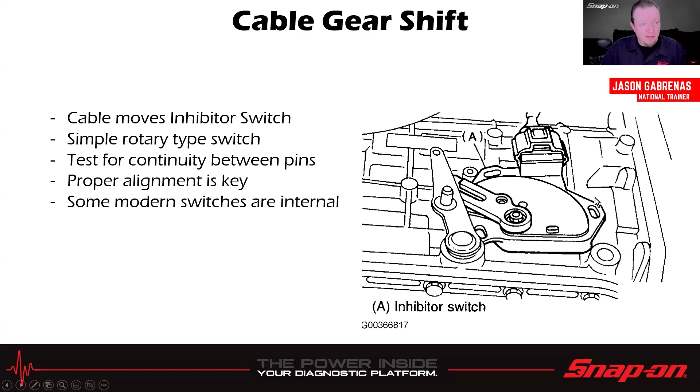And then some modern switches are internal instead of external. So that brings up a whole other can of worms, I guess, if you need to adjust those. So definitely some good advice for that.

If we look at the switch itself, we see we have three sets of contacts. This one has park and neutral, which go to the starting and charging system. If for some reason it's not making contact there, maybe it's halfway in between or in reverse when it's not supposed to be, then it won't send the signal to the starting and charging system, and it won't allow start. This one's for the reverse circuit, because that goes to the reverse light system. So when it hits reverse, it closes the circuit and sends a signal out to turn on the lights.

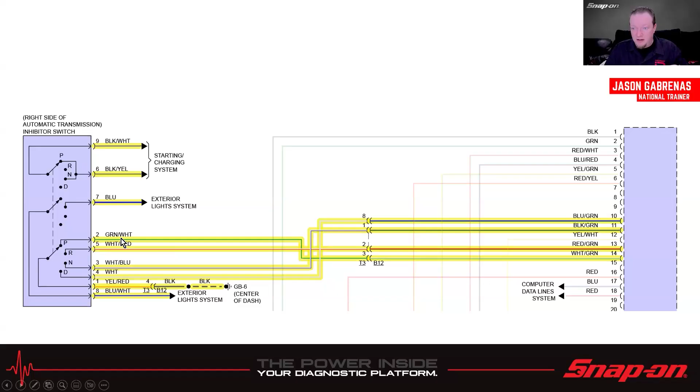And then down here is what indicates to the computer what gear we're in. In this case, this is an older model, so it has direct wires to each individual pin on the TCM. Some vehicles do it electronically now instead of having just the direct connection from park, reverse, neutral, or drive.

Also with these, and not necessarily just these, there's also sport shift, which you can see in a vehicle. You pull the gate a little to the left, and then you just go forward and backward to manually shift your automatic transmission.

It can be had with or without a cable. It's simple switches for the plus and minus. So there's a switch to know it's in the gate, a micro switch to go forward, a micro switch to go backward, and it just sends the signal along. So you'd want to test for continuity between the pins.

Alternatively, steering wheel paddles and switches can be used. Now, when it comes to the steering wheel, probably not so much micro switches anymore—well, I guess they still have micro switches in them, but they're not sending voltage. They're usually sending a LIN signal over LIN bus. So oftentimes, most of the things on the steering wheel nowadays send a signal over LIN bus to whatever module needs it.

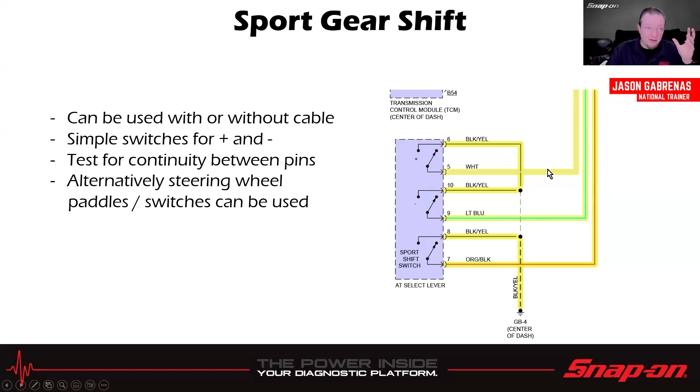So this is the sport shift switch. That's when you put it in the gate, and then up and down, right? So you've got plus, minus, and the sport shift switch there, and those send the signals out to the TCM, so the TCM knows it's time to shift up or shift down.

Then we get into the wonderful world of knobs. I believe this started in Chryslers—it's definitely very common in Chrysler, FCA, Stellantis, whatever you want to call them. Other vehicles use them too, but I thought it was an interesting choice to have a big knob next to a bunch of other big knobs. If I'm trying to pay attention to driving, not looking at where the knob is, and just kind of holding my hand over it, a mistake might happen. Actually, come to think of it, I think there was a movie or TV star who passed away because his Jeep crushed him at the end of his driveway—he thought it was in park and it wasn't. So there you go, and it did have a knob shifter as far as I recall.

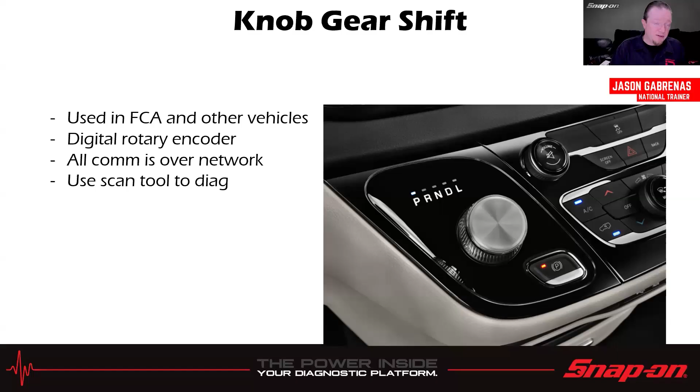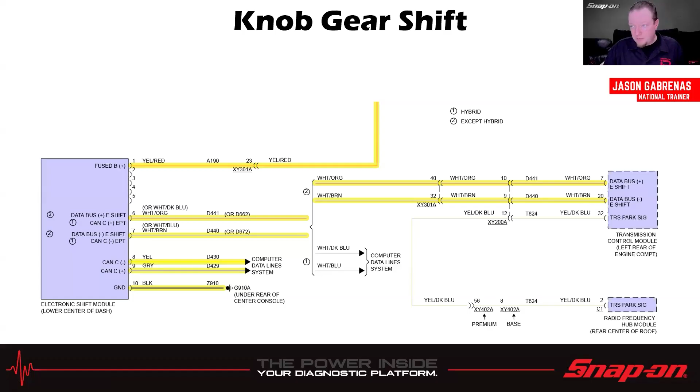Anyway, it works as a digital rotary encoder, so it's all digital—sends it over the network. You're going to use a scan tool to diagnose it. You might be able to use a scope as well, because it does go over CAN. In this case, we have the data bus for the shifter and CAN, plus other CAN buses associated with it. But from the shifter to the transmission control module, it's all CAN. So you could check for a CAN bus signal there, or check to see if the data changes in the transmission control module.

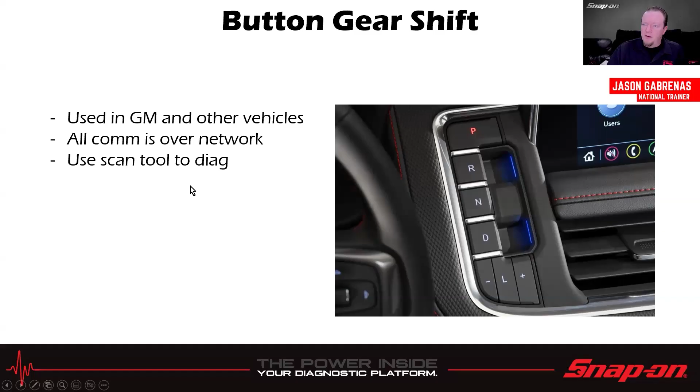We've gone back to buttons. Way back in the day, there used to be button shifters on the console or dashboard, and now they're back in GM and other vehicles. All communication, once again, is over a network. This is basically just a module, and you use the scan tool to diagnose it. I could actually manually shift up and down here too, which is kind of an interesting choice, but you definitely use your scan tool checking for data, because this is going to be digital network data going over the lines there.

In this case, this is off a GMC Acadia. The gear shift control module is right there, and we have multiple data lines coming off of it, and there's a logic panel in there. It sends the signal digitally, like I said.

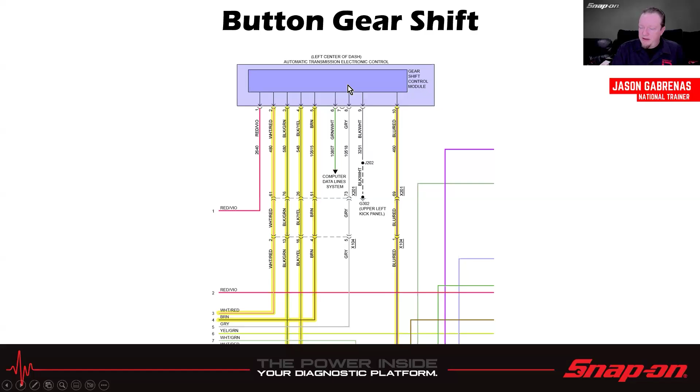More recently, we have stalk gear shifts. The first time I ever saw it was in a GM, but I'm sure other manufacturers are doing this too. I had a brand new Acadia as a rental a few months ago, and I'm like, oh, where's the shifter? Oh, there it is - it's not my wipers anymore, it's my shifter. And how do I get this thing out of park? Luckily they label it, but it's not intuitive at all. If you're in multiple different vehicles, like rental cars all the time, it's not that intuitive. I'm sure you get used to it after a while.

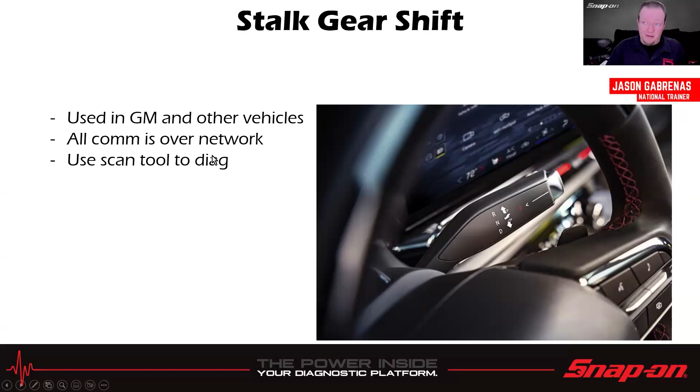Once again, this is all digital, so it comms over the network. Use a scan tool to diagnose it, and possibly a scope if you're trying to read the signals.

Now, another interesting thing with this - if you look at the wiring diagram, here is my gear shift control module, which is in the steering column, the right side stalk. Looks like it does have actual micro switches in there, probably. It does have where it makes connections, but it all connects into a logic board, and then the logic board makes the decision on what to do.

Also interesting, it is provided a 2.5 volt reference and a 1.5 volt reference. So if I didn't look at the wiring diagram and was looking for a 5 volt reference somewhere, and only finding 2.5 volts, I'd think, oh, I got a voltage loss somewhere. Well, guess what - it only runs on a 2.5 volt reference there and a 1.5 volt reference there. Luckily it's spelled out in the wiring diagram. That's certainly an interesting choice. I'm sure it doesn't need that much voltage to process what it needs to do, but everyone else uses 5 volts - I don't know why they couldn't just use 5 volts across the board. But anyways, that's a thing that exists, and you may have to diagnose it sometimes, so keep that in mind.

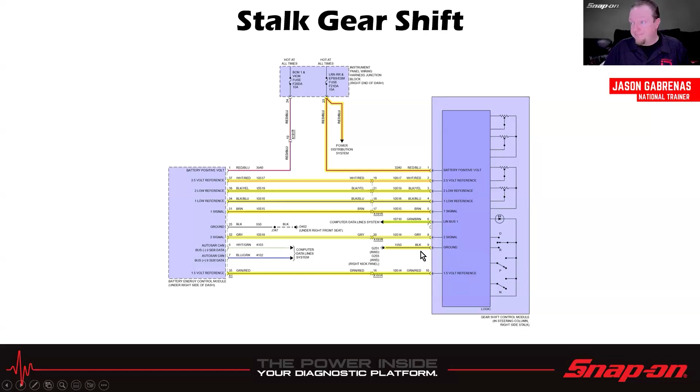All right, let's go to the sensors that are going to help the computer understand what's going on in that transmission. So we have a temp sensor for the fluid temperature. Some are negative coefficient thermistors, some are positive coefficient thermistors. In the case of a negative coefficient, as the temp increases, the voltage decreases. Test for voltage and resistance, and sometimes it's part of the valve body.

Due to it being part of the valve body, it might be difficult to access. Some of them are kind of on a harness right there, and it's easy to get to when you drop the pan. Other ones are maybe up on top or just in a not as easily accessible place.

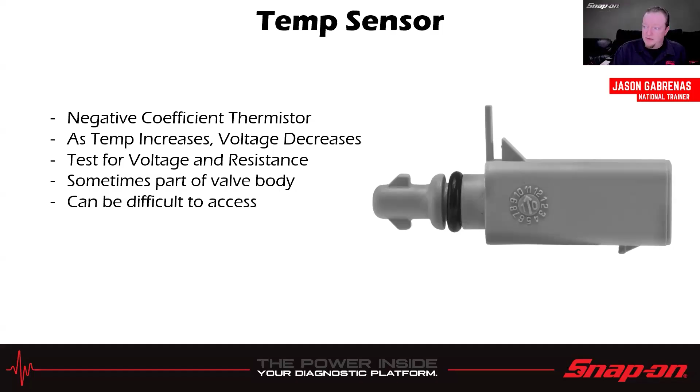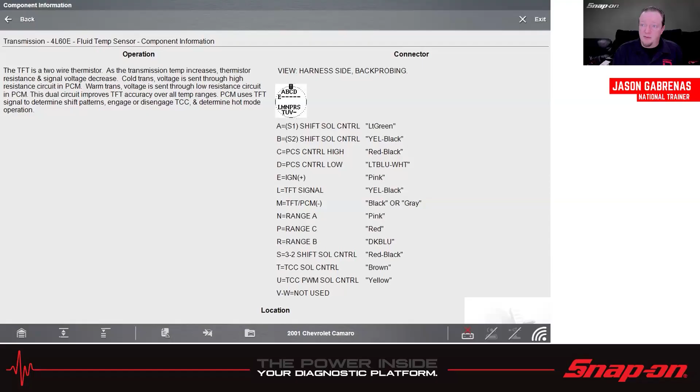In this case, this is on a 2001 Chevy, so a 4L60. Transmission fluid temperature sensor is a 2-wire thermistor. As the transmission temp increases, thermistor resistance and signal voltage decrease. Cold transmission, voltage is sent through a high resistance circuit. Warm transmission, voltage is sent through a low resistance circuit. This dual circuit improves accuracy over all temp ranges. PCM uses the transmission fluid temperature signal to determine shift patterns, engage or disengage torque converter, and determine hot mode operation.

So it's also good to be able to find this temperature to resistance to voltage chart. If it's say 104 degrees Fahrenheit, 40 degrees Celsius, that'd be 1313 minimum, 1459 nominal, 1605 maximum, which gives us an output voltage of roughly 1.10 volts. You can see how it varies a little bit. Right here is where it looks like it switches over, because it goes from 3.45 down to 1, and then it goes 3.25 down to 0. So there's a switch over in the middle - we go from the high resistance to low resistance circuit, like they talked about.

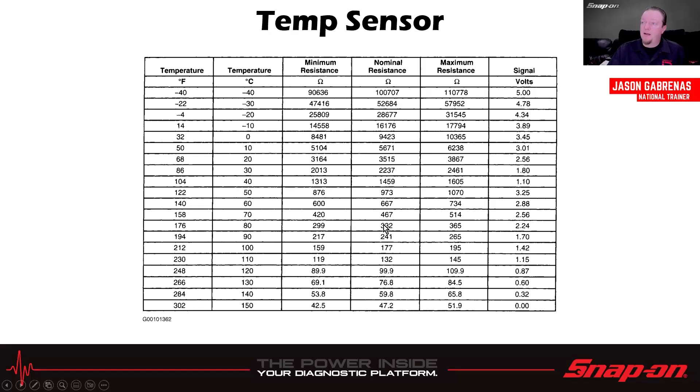Next is a speed sensor. Generally speaking, they're going to be a Hall effect sensor, 3-wire. Reads input and/or output shaft speed, or multiple shaft speeds. It could be multiple things, but you're generally going to have 2 - an input and/or an output. You're going to test it for voltage or resistance.

Sometimes it's part of the valve body, and due to that, it can be difficult to access. Sometimes they're right on the outside of the vehicle and they just bolt in like a crank sensor or a cam sensor. That makes it a lot easier.

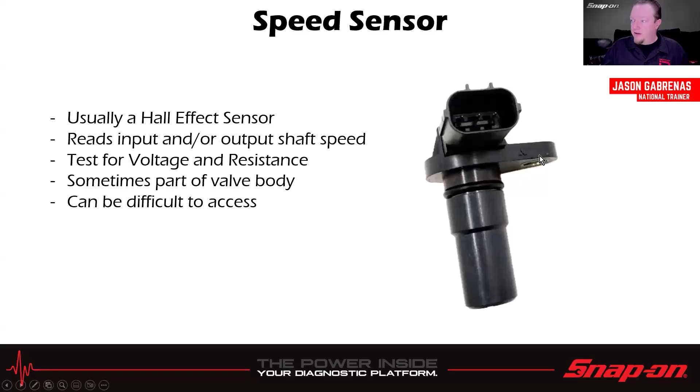So this would obviously be an external one. Looks like it's a Mitsubishi according to that logo right there, but it's just a Hall effect sensor like a cam or crank sensor. In this case, it's on an '09 Subaru, and that is the 5-speed automatic that they had for a while. So turbine speed sensor 1 measures trans input shaft speed and torque converter speed. Turbine speed sensor 2 measures transmission speed. This is one where they actually had some issues with these, at least the early ones, because the stack would move and shift inside the transmission.

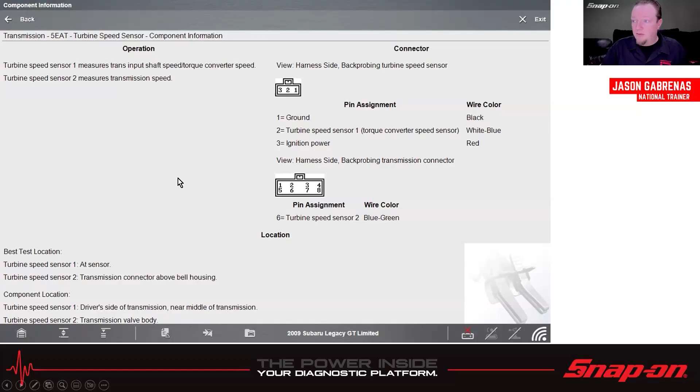And then it could throw a code for a speed sensor because the plate that it reads might go out of where it needs to be. I think it was probably just the early ones, but I do remember we had to deal with that in the shop where they were shifting.

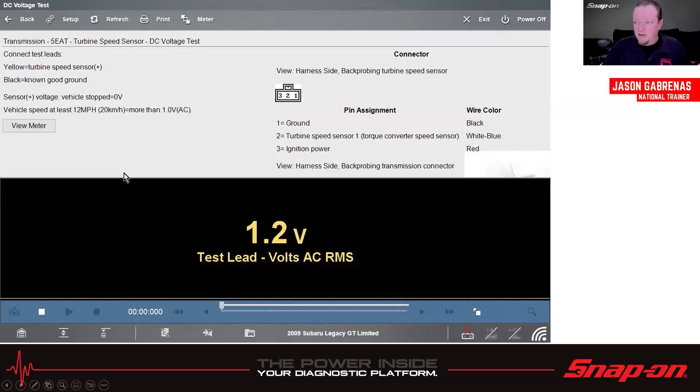And then here we go, let's just do a DC voltage test. It should be more than 1 volt AC, vehicle speed at least 12 miles an hour. So this actually does volts AC in this case.

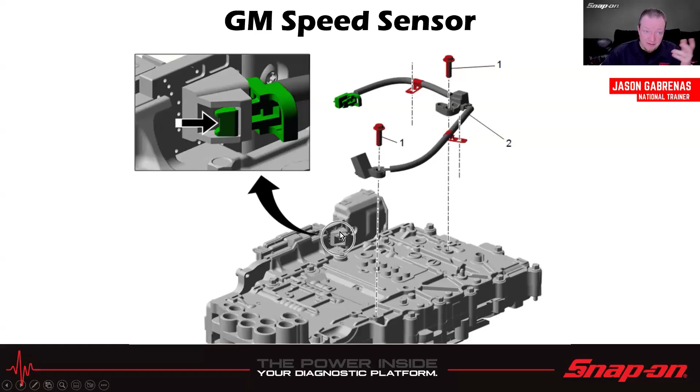Now remember how I said sometimes they could be difficult to access? Well, here's one on a GM, and you can see there's the connector there which goes off to the side there - there's the TCM. And then the 2 speed sensors are actually right above the valve body, so you would have to drop the valve body in order to access that. Probably, unless there's an alternate location you could test it, you probably have to test it outside of the vehicle because you can't get to it to test it.

All right, next we'll get to the solenoids. There's 2 different types of solenoids you're going to find in an automatic transmission, and they're usually going to be for moving fluid around within the valve body, shift solenoids and such. So we have on-off solenoids, which are either on or off, open or closed. Computer controls the ground side or the power side, depending on how it's wired. It's an open-close function - like I said, it's either on or off.

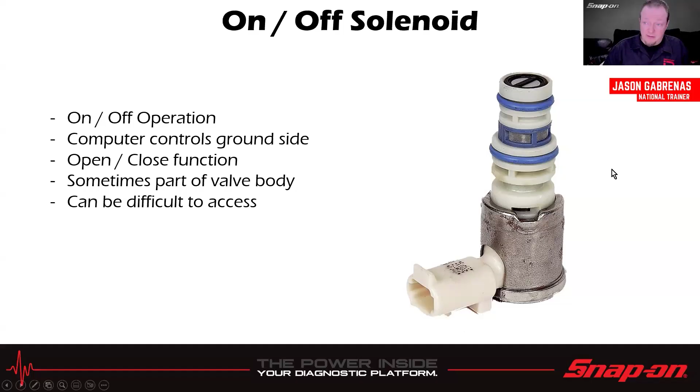Sometimes it's part of the valve body. Generally speaking, they're going to be in the valve body at any rate. They could be from underneath. There's a couple of vehicles I've seen where it's like all in a row in the back of the valve body - that makes it fairly easy to get to. I know like on Subarus, there's like a bunch of them around the bottom of the valve body, so it's just one bolt and a plug and it comes right out. Sometimes they're on top - just depends on the manufacturer. So due to that, it could be difficult to access.

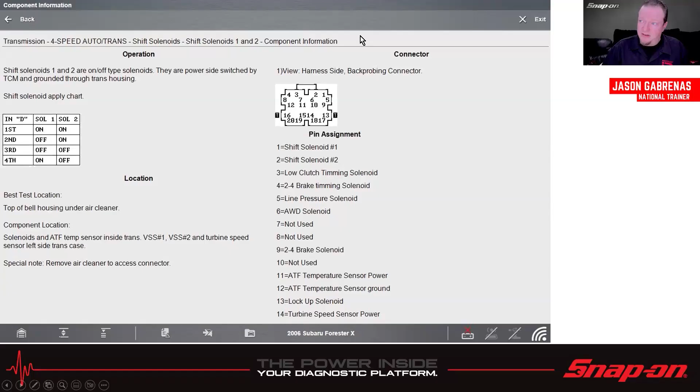So here's an example on a Subaru. We've got a bunch of shift solenoids - low clutch timing solenoid, 2/4 brake timing solenoid, all-wheel drive solenoid, etc. Everything kind of goes through that one connector, and then it gives you a little shift pattern here. So to be in first gear, both solenoids are on, and so on and so forth. And in this case, it's going to be at the main connector, so it's easy enough to get to.

Shift solenoids 1 and 2 are on-off type solenoids. And then some of the other solenoids are going to be a pulse width modulated solenoid - so it's modulated on or off. Computer controls power or ground side, depending. Opens and closes by a percentage - so say I want to close 80%, open or closed 80% of the time, or what have you. It just opens for a fraction of time.

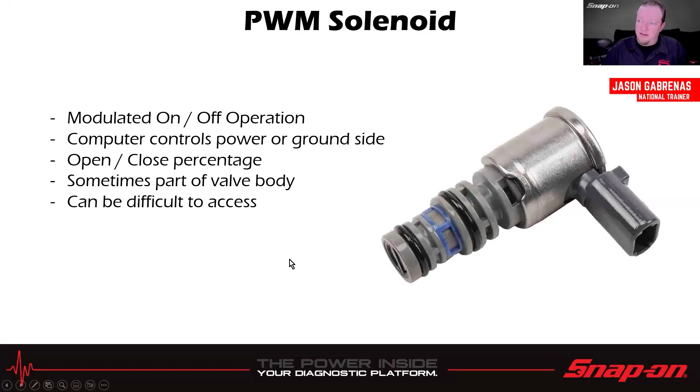Once again, sometimes part of a valve body, and if it is, it can be difficult to access. Sometimes you can only get - it's not replaceable. So the torque converter clutch, in this case, is an integral part of the solenoid body, and being so, it's not available as a separate unit. In this case, it is part of the valve body, so you have to order a valve body if this fails.

The torque converter clutch solenoid is both power side and ground side controlled by the PCM or TCM on some vehicles. It controls common solenoid power used by all solenoids in order to cut power in case of a circuit fault. Solenoid duty cycle is controlled on the ground side to allow for smooth torque converter clutch actuation.

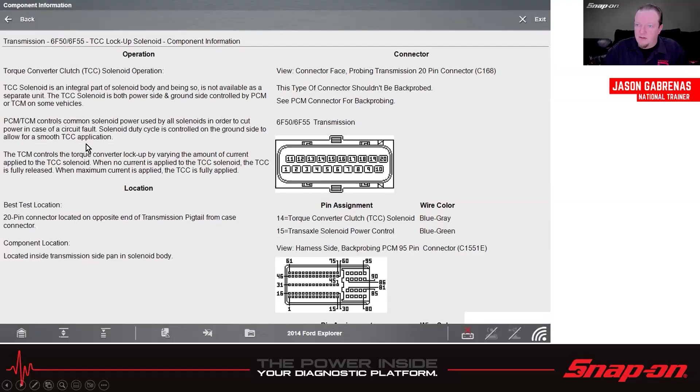We have some tech notes here: this transmission uses 2 on-off type shift solenoids and 6 pulse width modulated type solenoids for pressure control. This is on a 2011 Camaro.

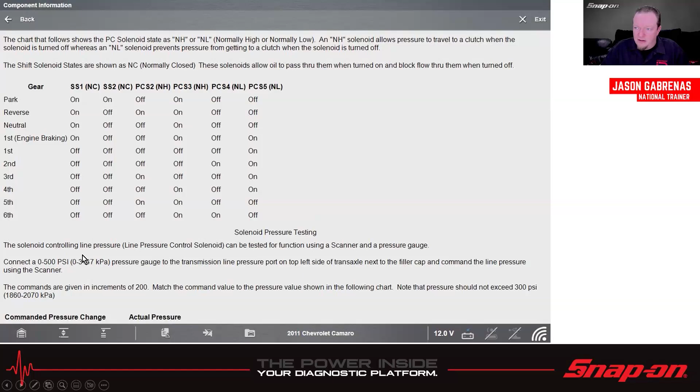So normally high, normally low, and then in whatever combination they need to get through all these different gear combinations. And of course, the more gears we have in a transmission, the more solenoids we'll need to make it work.

We could also do pressure testing. So if we use a pressure gauge, or you could even use a pressure transducer on this. In this case, 500 PSI they want, and then you can check your actual pressure based on your command pressure change.

And then we get to adaptives. Adaptives are used on multiple manufacturers. I think probably pretty much everybody nowadays uses some sort of adaptation. As you drive, it learns how you drive.

So to equalize tolerances and wear, an automatic adaptation takes place for shift time, clutch filling pressure, torque converter lockup control. Adaptation data may be stored permanently and to some extent can be diagnosed.

And then there's driving style adaptation. Shift point is modified in steps based on the information from the inputs. The control module looks at these different inputs, and based on how aggressive the driver is, the TCM moves up the shift so the present gear is held a little longer before the next upshift.

So if you drive like a little old lady, it's going to shift differently than if you drive like a race car driver, right? So it adapts over time.

And when you replace things in the transmission, you usually need to use the scan tool to initiate some sort of learning mode, adaptation mode. So in this case, once again, a GM service fast learn adapt. There's a bunch - every manufacturer calls it something different.

But it says the procedure must be performed when one of the following repairs have been made to the vehicle. Failure to perform the procedure after one of the following repairs may result in poor transmission performance as well as transmission codes being set: transmission internal service or overhaul, valve body repair or replacement, control solenoid valve assembly replacement, TCM software calibration update, any service in response to a shift quality concern. So it needs to get done anytime any of that happens.

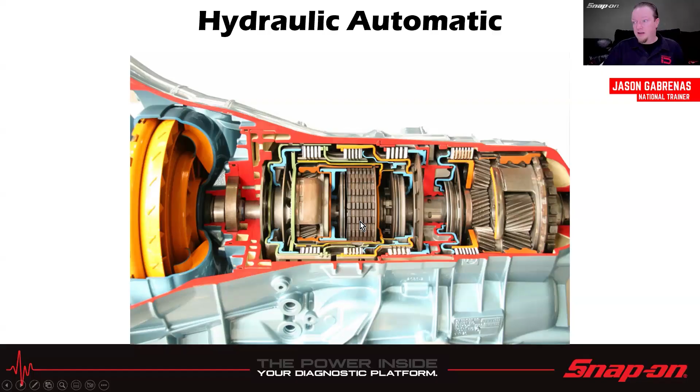That is your standard hydraulic automatic transmission. It's been around forever. There are a couple different transmissions out there now that are a little unique. This one's the Volkswagen and Audi DSG, so that's a direct shift gearbox.

This is basically a hydraulically actuated manual transmission with 2 clutches. That's what it is. And we can see actually it's got a cable shifter. So look at that.

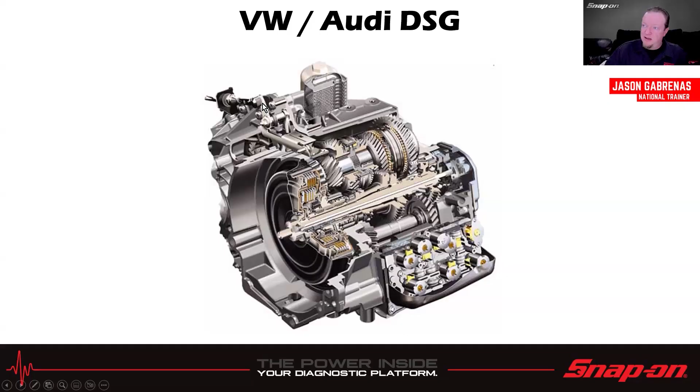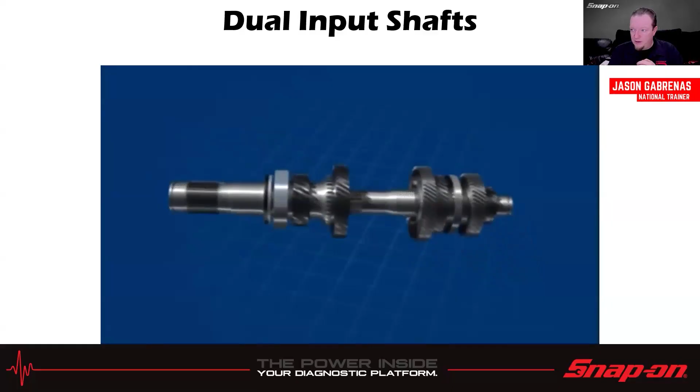The heart of this is going to be dual input shafts. The outer one rides on the inner one. You see that the outer side has a larger spline than the inner one, and that is to go into the 2 different clutches. Now half the gears go into one and half go into the other. That's because if first gear's on one shaft, second gear's on the other shaft, third gear, and so on. So it kind of alternates back and forth in order to be able to shift using the automated clutch.

The automated clutch that Volkswagen and Audi use is actually like a friction clutch that you would see on a standard or manual transmission. So it has two clutches. You see that one has a larger spline and one has a smaller spline. The larger spline goes on the outer shaft, the smaller spline goes on the inner shaft, and then we have 2 clutch forks here that kind of operate within each other.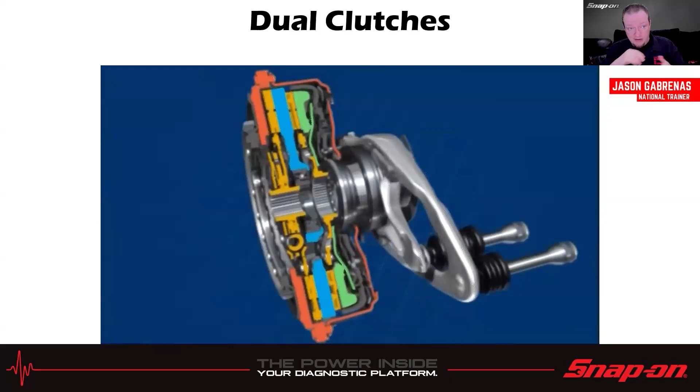And then these are actuated by hydraulic pistons, so hydraulic actuators—they call it the mechatronics. That's one way of doing it, and that's how Volkswagen Audi decided to do it on their direct shift gearbox.

BMW also has a dual clutch transmission, which is essentially a manual transmission, but instead of using clutches, it actually uses dual clutch packs like on an automatic transmission. So it's hydraulically actuated just by compressing the clutch packs instead of having the forks and the friction material and the pressure plates and all that other stuff that Volkswagen did.

Seems to me this is probably less moving parts, so it should be simpler, I would imagine. And it's probably just a clutch pack that you would just replace. I don't know, I've never had to replace one myself. You could probably rebuild it, or they probably sell you a whole thing, or you just replace the whole transmission. I don't know. But it does look very much like those clutch packs we saw in the automatic transmission, the hydraulic actuated transmission, because they are.

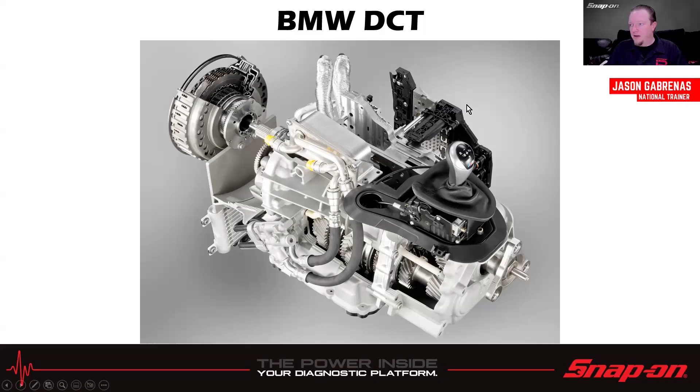It's the same idea, and this normally would be on the shaft. This has got two input shafts as well for the 2 clutches, so the clutches kind of overrun each other. And it's got the mechatronic unit over here, which helps with the pressures and stuff like that. There are some things that need to be done scan tool wise on that too, because of the oils and stuff like that.

Next one's the CVT. Many manufacturers have gone to a CVT, many manufacturers have not gone to a CVT. Some manufacturers, instead of making a continuously variable transmission, which is what CVT stands for, they decided they're just going to keep adding gears. We've got 10-speed gearboxes out there now, 11-speed gearboxes out there now, automatics. So it's all in the name of fuel economy, really.

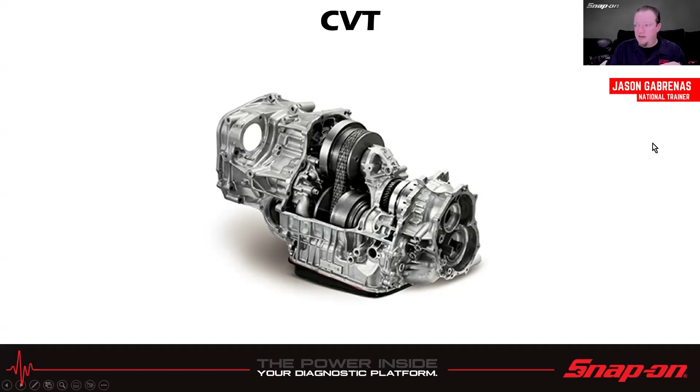But the CVT—this one's off of a Subaru, so it's a little less compact than some other models you might find out there. They've been around forever, but probably the biggest mass market one was the Murano. That was probably one of the more famous ones, I guess, because they used to break all the time spectacularly.

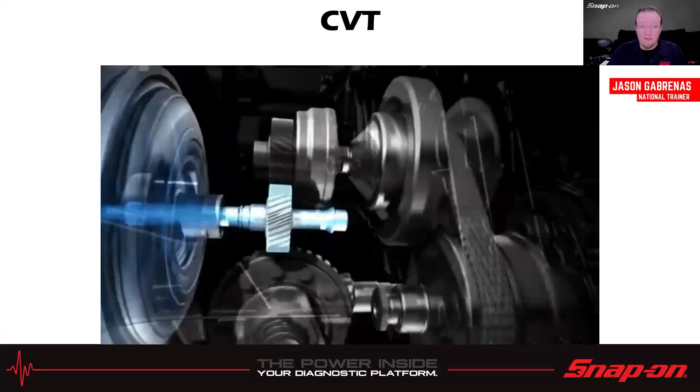So much so that Subaru bought a bunch of them to tear down and find out where the weak points are, and engineer that out when they made theirs.

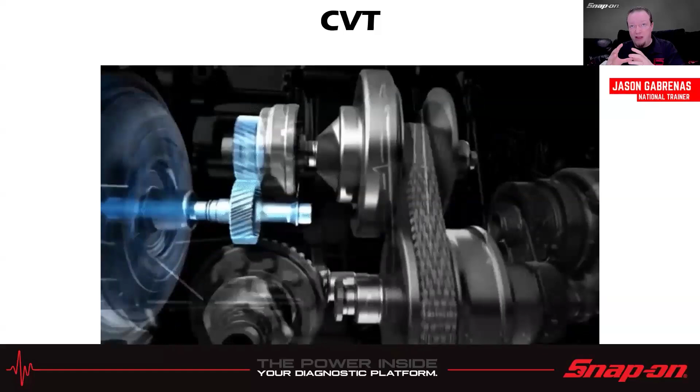But anyways, we can see we got two pulleys, and they're kind of variable pulleys, and this is a metal belt that goes in between the two pulleys. By changing the size of the pulley, you're changing the speed of the output shaft. So the input shaft's probably going to be the same speed.

That was the wild thing. The very first time I drove one of these, you're driving down the road and it's accelerating, but the RPMs are stuck at 3,000 RPM. It's not going any higher, but the speed sure is. So it's just continuously changing and varying those to increase the output speed.

No actual gear changes. Of course, there's gears in there, mesh gears, but no gear changes. Now, so much so that nowadays many manufacturers have programmed in actual shift points, so it feels like the car's shifting even though it's not.

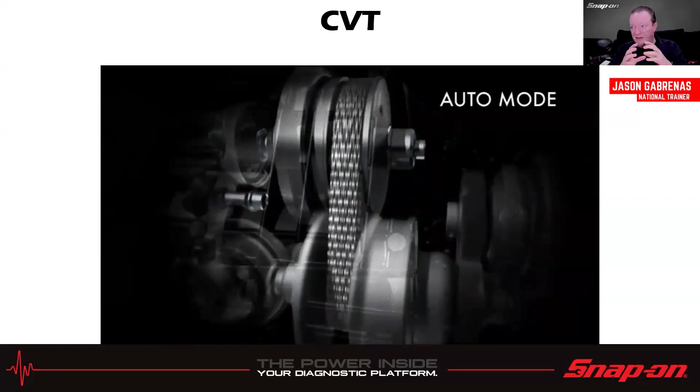I'd imagine it probably just gives it a quick jolt or something to make it feel like a shift. I'm not 100% sure how they make it feel that way, but I know my mom's got a 2017 Crosstrek and it feels like it shifts even though it's got a CVT in it.

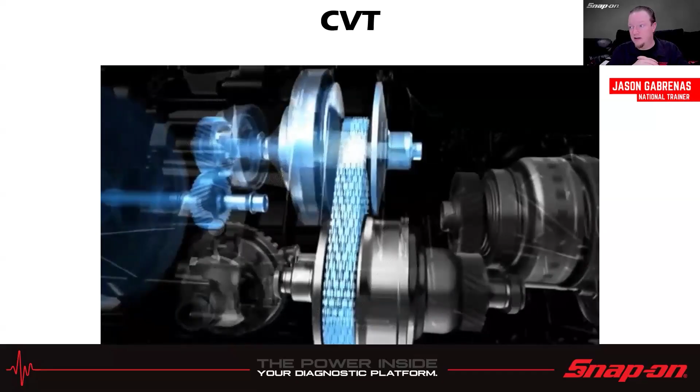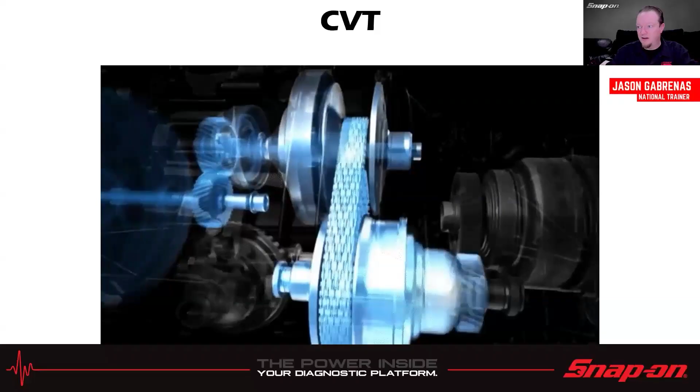I think it's just because end users were a little disconcerted, or maybe they were going way too fast, because I could see that happening too. I can accelerate up to 80 without really noticing, and like, oh boy, I'm speeding, okay let's slow it down a little bit. So I would imagine it was end user feedback that caused that to happen.

It's kind of interesting. So like I said, metal belt, two pulleys that change size so one spins faster than the other.

Usually, I believe most manufacturers say if anything goes wrong with these, it just gets a transmission anyway. I just thought it was kind of funny when we got trained on these.

For the first year, it was like the 2010 model year, they actually had us go in and tear them down and rebuild them. And then after that, they said, well, you're never going to do that, because if it's so much as a drop leak, we want it back and we're going to send you a new one. So I don't know why they had us ever tear them down, because I think even still to this day, 15 years later, they're just putting remans in if they need it, anything to do with the transmission.

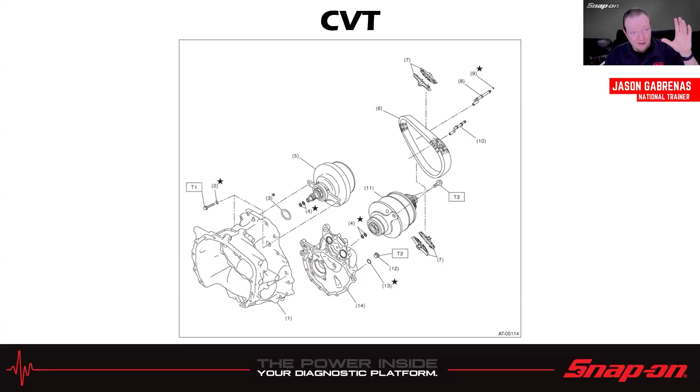Don't take it apart, it's permanent fluid. Don't need to do anything with it. Just don't touch it, just let it go, I guess.

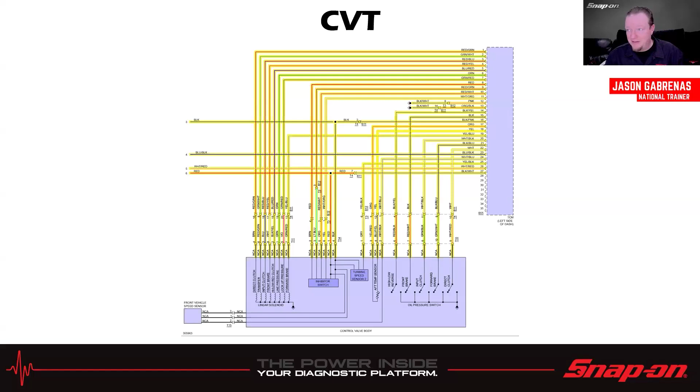And you see it's all electronically controlled, right? So we got clutches in there, brakes in there, but it's all like oil pressure switches, and the TCM just controls everything. So really no tear down going to happen with one of those. Maybe you might, if you like doing it, I don't know, I guess you could, but more than likely it's probably going to get a transmission.

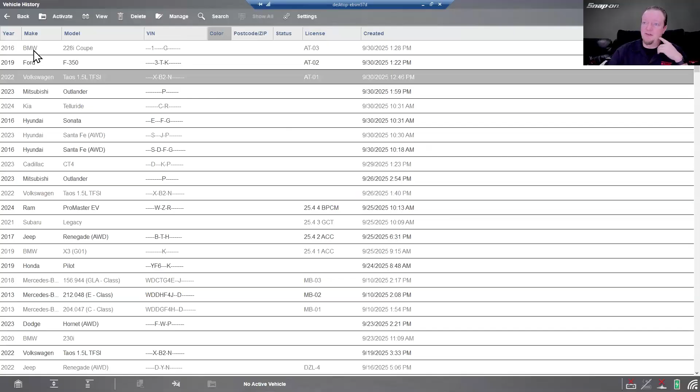All right, let's go live on the tool and take a look at a few examples of what I just spoke about. So first one's going to be this 2022 Volkswagen Taos, and that has the dual shift gearbox.

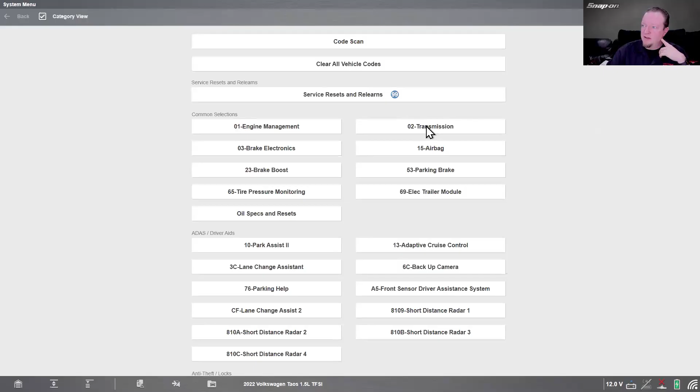So I'm just going to load in there, go into number 2 transmission. It's going to tell me I'm in sim mode. I got to pick the right one, and that is this one. And you can see, oh by the way, 2022 Volkswagen, so that means we have SFD, which is the secure functions, Secure Functions Diagnostics I believe is what that stands for.

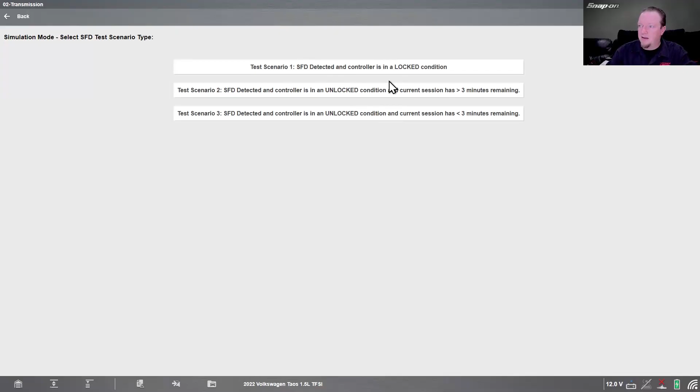It's German, they mix up the words. But some systems may require access to manufacturer secure diagnostic requests. So we might be able to see that if we go into functional tests. Yeah, I can, in the simulator, simulate any of the modes, so we'll just say it's locked and go in.

Now with Snap-on tools, with Volkswagen and Audi vehicles, in order to access these secured functions, all you need to do is set up a free profile access code in your Snap-on profile. So it's any 4 digits, and if it needs access, it's going to prompt you to enter those 4 digits here.

So I'm going to enter the wrong ones just so you can see what happens. And okay, oh sorry, invalid code, 4 attempts remaining. So you get 5 total attempts to get in, and it just locks you out.

So I'm going to put in the right one now. Okay, and now it'll allow me to do the functional test. So Volkswagen Audi is a little bit different than what you might notice with like Stellantis, where they lock the whole vehicle out, and Nissan, where they lock the whole vehicle out.

On Volkswagen and Audi, it's down to the functional test level, so you won't get prompted until you get to a test that's secured, which is good. It saves you time and hassle.

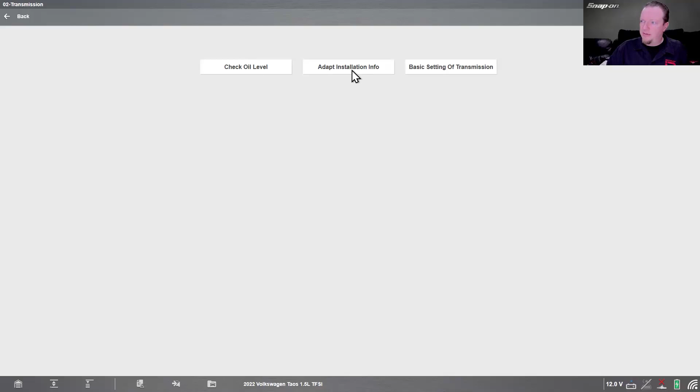If we go into special functions, we have things like check oil level, adapt installation info, and basic setting of transmission. For installation info, the following steps will be performed: establish basic setting for CAN installation information. It's only going to let me go so far, but this needs to be done after software update, after replacement of the control module, after replacement of the selector lever, after work on the steering wheel paddles, and after another control module is replaced, for example engine, ABS, or gateway. So this needs to get done in a fair number of circumstances.

I'm just going to go in there, and it's probably going to fail. Oh, I know this is the one that runs forever and never stops. It's just going to go through and do the routine on a real live vehicle, not a simulator. It would go through and say, all right, it's complete. In this case, I need to cancel.

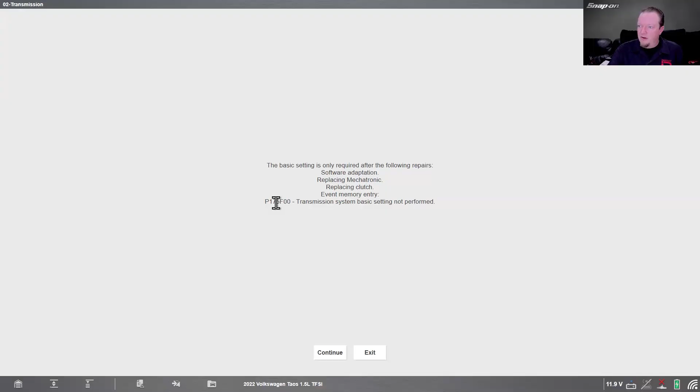Basic setting of transmission is going to be similar. When I do a software adaptation, replace the mechatronics, replace the clutch, or have an event memory of this P175 code, that needs to get done. If the entire transmission is replaced, you don't have to do this because it's going to have basic settings anyway. Engage P, start engine and let it idle—and it's going to say it's too hot. But let's see if it just lets me exit. There we go: test parameters are not correct.

Now this brings me to another point. We get phone calls a lot at the tech support center saying, hey, this test doesn't work, why is it not working, it's broken, et cetera, et cetera. Well, the manufacturer oftentimes has certain set parameters that need to be met in order to do this function.

So we will not let the function happen unless it matches what the computer wants. Most times we will try to have that verbalized on the screen, like it said there, it needs to be between 35 and 45 Celsius or whatever. We try as best we can to verbalize it on the screen. If for some reason we don't, we find it and then try to fix that. So the vast majority of the time, you should find help when it comes to that type of thing. If you don't find it in the tool, always look in your repair information, and that should give you what you need as to what it requires to do its tests.

Next one, we'll do a big old Ford diesel, a 350.

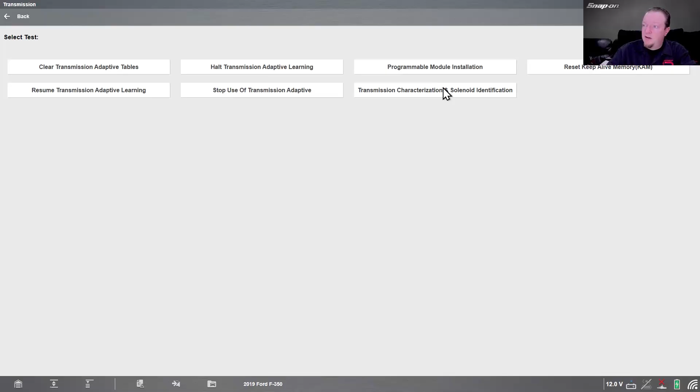This one is kind of unique with the transmission. There's a function in here we added about 8 years ago in the functional test special functions: the transmission characterization and solenoid identification. So think about it—I'm trying to diagnose this transmission, and maybe I've figured out it's one of the solenoids and I know what solenoid it is. I just don't know what solenoid's in the transmission because I haven't totally disassembled it yet. Maybe I've been able to test it from the outside or something like that. I want to order the part, but I want this vehicle to be able to move because I have to wait for the part to come in and all that. So this will help by telling us how the transmission is set up.

It's used to read the transmission strategy and identification from the module. Refer to the vehicle workshop manual for further system details. So it's going to confirm what's in there—it's a 10-speed, I'll say yes—and then it's going to give you the numbers you need. Transmission identification and strategy should match the service tag on the transmission. If the tag is missing, damaged, or if the strategy identification doesn't match the tag, it may be necessary to remove the main control cover and obtain the identification and strategy information from the solenoid body, but this allows you to read that without doing so.

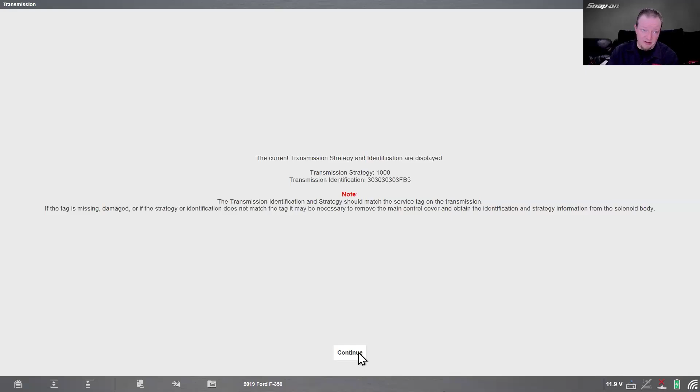And then as far as the individual solenoids, it's used to obtain the transmission solenoid band information for ordering individual replacement solenoids, since every solenoid is going to be a little bit different.

In this case, we're going to provide transmission solenoid band information for individual solenoid replacement. It'll give us the strategy, the body, then tell you what solenoid is what, the band number, and the range, and of course they would all be different. In this case it's a simulator, so they're all the same. But it would tell you, hey, I need this particular shift solenoid. You call the dealership and say I need this solenoid with this band number, this range number, and they'll send you the right one to replace it. That could be helpful in those circumstances.

Also in here, let's see, yes, we have guided component tests as well on this transmission. Not the 10-speed though, I guess that's the only one we got. It's a 6-speed.

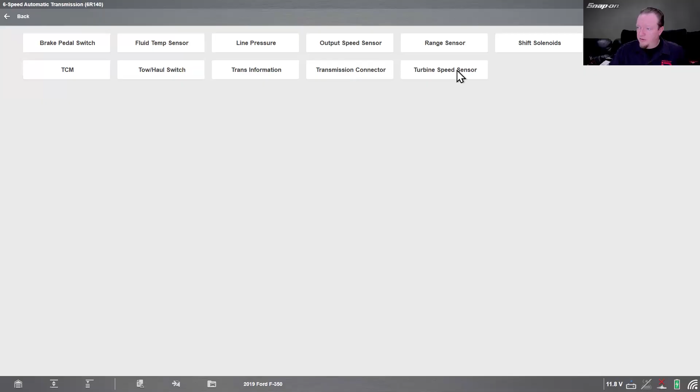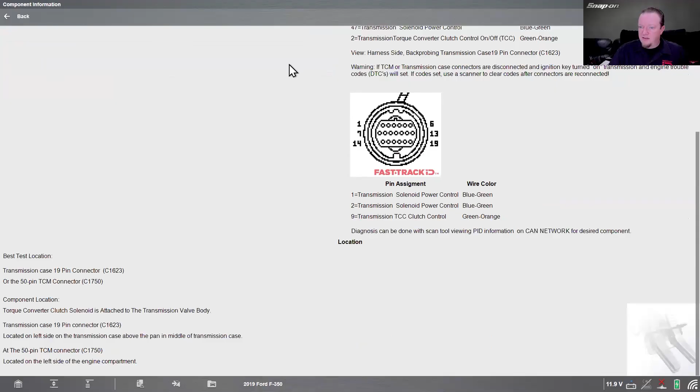So TCM, transmission information, transmission connector, turbine speed sensor, range sensor, shift solenoids, lockup solenoid, output speed sensor, line pressure - all these different things we can test. Let's say the lockup solenoid - it'll tell you to test it at the transmission or the TCM. 3-port directly proportional VFS type located in the trans valve body. TCM supplies 12 volts to the torque converter clutch solenoid. TCM electronically controlled driver commands ground on time to modulate the pressure. On time - weird way to put it, quotes around that.

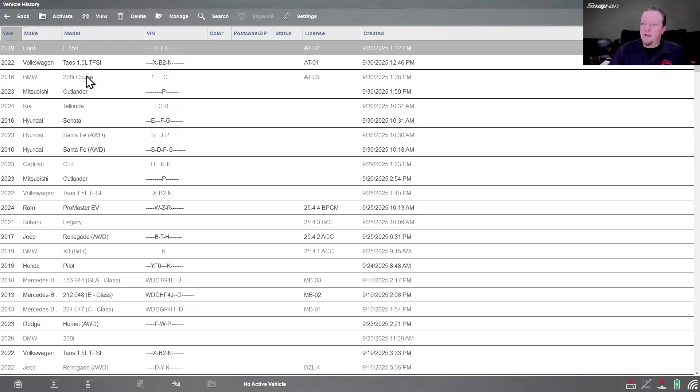All right, and then lastly we have the 2016 BMW 228i, which is going to have the dual clutch transmission, the dual automatic clutch packs. And in this case, we have oil balancing - we're just going to be able to tell some stuff.

Let's see - oil level in the automatic gearbox can only be adjusted when the following conditions are met. And then it's going to ask you why does it need to be adjusted. So it has faults stored in the transmission control for oil level check, or the mechatronics or converters have been replaced, or parts have been replaced. No mechatronics, no converter, but anything else that got replaced.

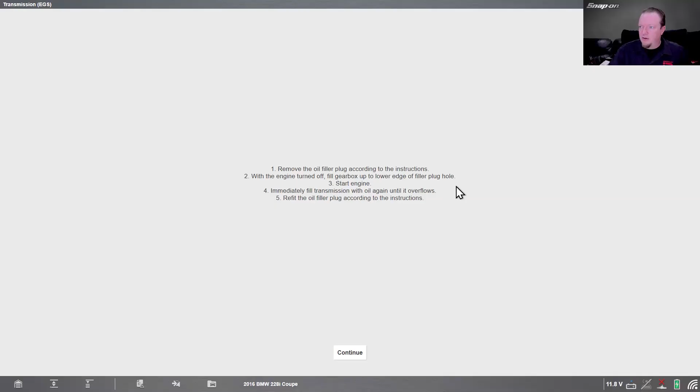So whatever situation it is, let's say we did something on the mechatronics. Raise the vehicle so the wheels turn freely, and apply the parking brake. Remove the oil filler plug according to the instructions. With the engine turned off, fill the gearbox up to the lower edge of the filler plug hole. Start the engine, immediately fill the transmission with oil again until it overflows. Refit the oil filler plug according to instructions. And then confirm you deactivated the stability control.

And with that, I am done. So that is automatic transmissions diagnosis.